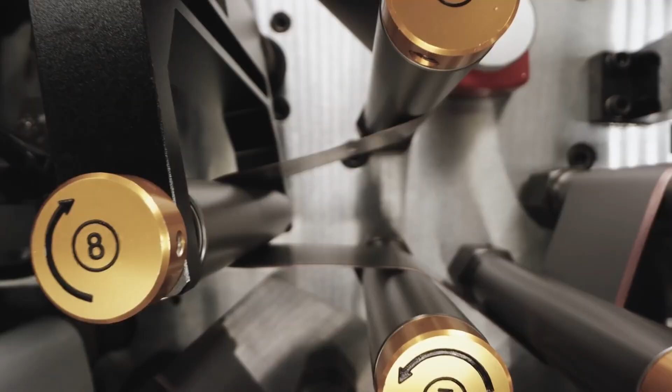The idea for the Sichuan-Tibet Railway was proposed in the early 2010s as part of China's Belt and Road Initiative, BRI. This massive infrastructure development plan aims to improve global trade routes and connect Asia, Europe, and Africa. The railway was seen as a critical step in integrating Tibet into China's national framework while leveraging the region's untapped natural resources. Tibet is rich in copper, lithium, and rare earth materials, essential components for green technologies like electric vehicle batteries and wind turbines.

The Sichuan-Tibet Railway starts in Chengdu, the vibrant capital of Sichuan Province, known for its spicy cuisine and pandas. From Chengdu, the railway heads west to Ya'an, a relatively easy stretch that was completed in 2018. Beyond Ya'an, the route becomes significantly more challenging, as it snakes through the Hengduan Mountains, crosses the Yarlung Tsangpo River Valley, and ascends the Tibetan Plateau.

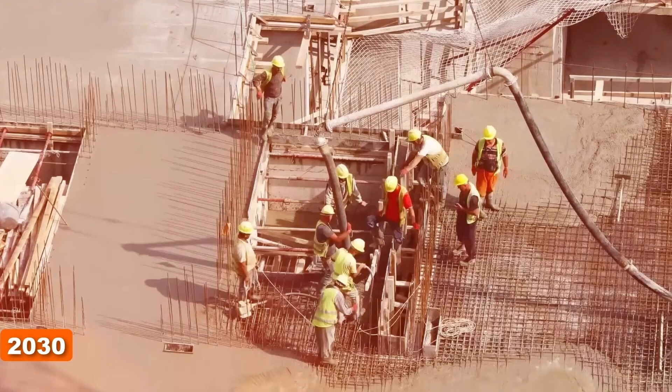This middle segment, which includes 72 tunnels and 121 bridges, is still under construction and expected to be completed by 2030. The engineering challenges are mind-boggling. The railway has to contend with an elevation change of more than 3,000 meters.

The starting point in Chengdu sits at just 300 meters above sea level, while Lhasa sits around 3,600 meters. In some sections, the tracks climb higher than 4,000 meters, where the air is thin and oxygen levels are 40% lower than at sea level.

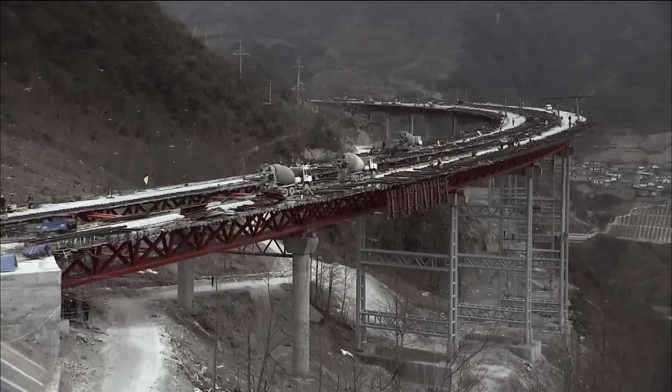To keep trains running safely and comfortably, engineers have equipped them with oxygen diffusion systems and pressurized cabins, similar to those in airplanes. Over 80% of the railway's route is composed of tunnels and bridges.

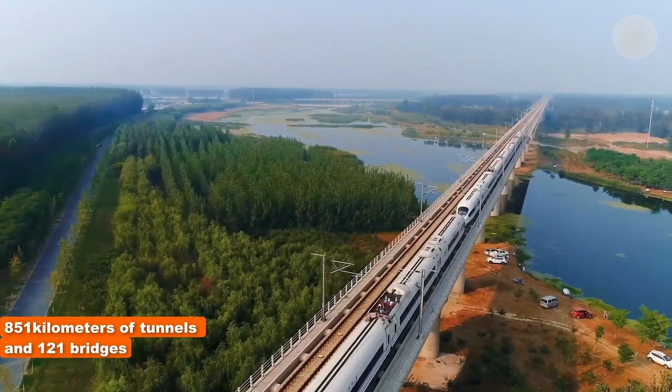The Yangbajing Tunnel, for example, stretches an incredible 42.5 kilometers, making it longer than the Channel Tunnel between England and France. In total, the railway includes 851 kilometers of tunnels and 121 bridges, some of which span massive river gorges and active fault lines. These structures aren't just feats of engineering, they're designed to withstand earthquakes, landslides, and extreme weather.

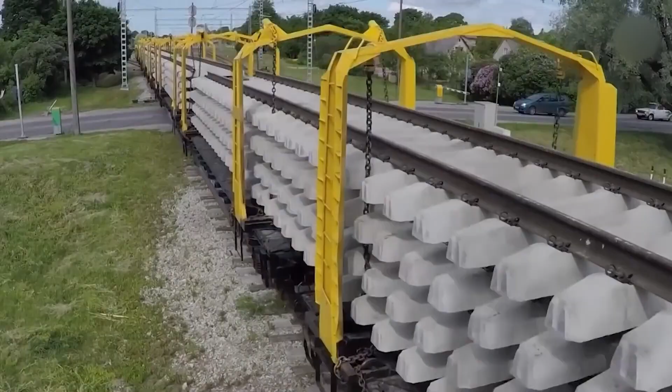The Himalayas are one of the most seismically active regions in the world, so engineers have used shock-absorbing foundations and flexible materials to mitigate the impact of tremors.

Another challenge is permafrost. Building a stable railway on ground that is frozen solid for most of the year but turns into a muddy mess during summer is no easy task. Engineers have employed cooling pipes and insulated foundations to keep the permafrost stable, preventing the tracks from shifting or sinking. These solutions are similar to those used on the Qinghai-Tibet Railway, but have been adapted for the unique conditions of the Sichuan-Tibet route.

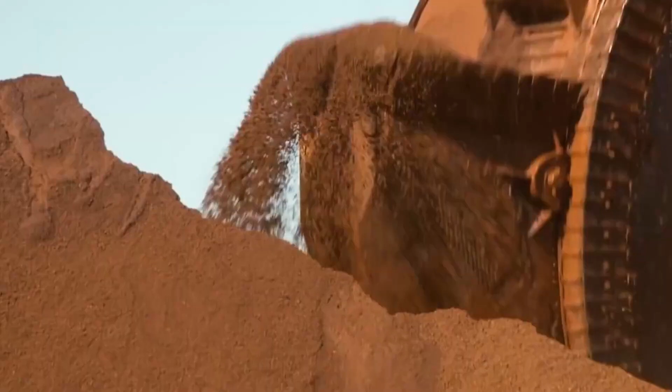Transporting construction materials to remote locations for the Sichuan-Tibet Railway represents one of the most daunting logistical challenges of the project. The terrain is exceptionally rugged, with many construction sites located at altitudes exceeding 4,000 meters. Some areas are so isolated that materials and equipment have to be transported by helicopters, while smaller components are carried on foot by workers navigating steep trails. This adds both time and cost to the construction effort, but such measures are necessary for a project of this scale.

For example, the Mila Tunnel, one of the project's standout engineering feats, stretches 10 kilometers and lies 1,200 meters beneath a mountain range at an altitude of 3,100 meters.

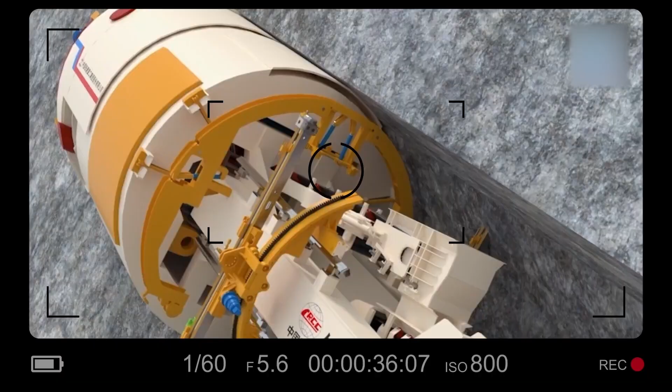Excavating this tunnel required the use of custom-designed tunnel boring machines, TBMs. These are some of the largest and most advanced in the world, engineered specifically for the unique challenges of this project. They're equipped to cut through layers of hard rock and permafrost while maintaining stability under immense geological pressure. The construction teams use advanced seismic monitoring systems to ensure safety, as the region frequently experiences tremors.

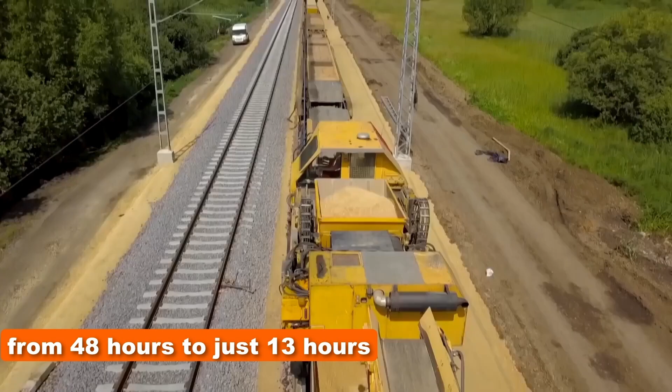The Sichuan-Tibet Railway's economic and strategic implications are monumental. Once completed, the railway will reduce travel time between Chengdu and Lhasa from 48 hours to just 13 hours. This reduction isn't just about convenience, it has the potential to revolutionize trade and mobility in the region.

By facilitating faster and cheaper transportation of goods, the railway will significantly lower logistics costs for businesses. This could lead to increased trade volumes between Tibet and central China, fostering economic growth in one of the country's poorest regions. Improved accessibility also means unlocking Tibet's immense mineral wealth.

The region is rich in natural resources including copper, lithium, and rare earth materials. These materials are critical for industries ranging from renewable energy to electronics. With better transportation infrastructure, mining operations in Tibet could become more economically viable, positioning the region as a key player in global supply chains.

Tourism is another sector poised to benefit. Tibet's breathtaking landscapes, unique culture, and iconic landmarks like the Potala Palace and Mount Everest Base Camp attract millions of visitors every year. The Sichuan-Tibet Railway is expected to increase annual tourist numbers dramatically, injecting billions of dollars into the local economy. This surge in tourism will likely create jobs in hospitality, retail, and transportation, providing new opportunities for local residents.

However, such growth brings its own challenges, especially in managing the environmental impact of increased human activity. Tibet's ecosystem is one of the most fragile on Earth, home to endangered species like the snow leopard, Tibetan antelope, and black-necked crane. The construction of the railway, particularly its tunnels, bridges, and stations, has disrupted wildlife habitats and migration patterns.

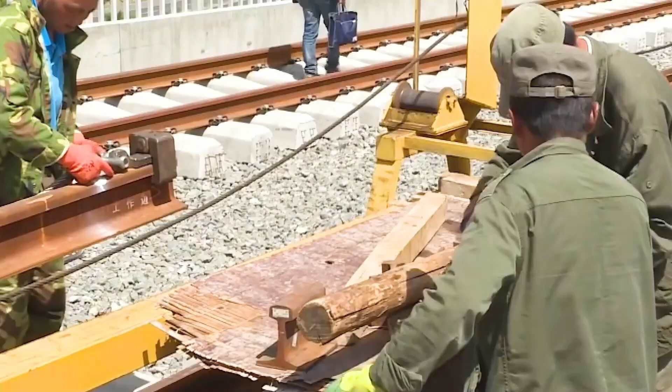The human cost of construction is another significant factor. Thousands of workers endure extreme conditions, including freezing temperatures, thin air, and prolonged isolation from their families. To combat these challenges, construction camps are equipped with on-site medical facilities, oxygen tanks, and acclimatization protocols. Specialized diets and rest schedules help workers cope with the physical and mental toll of working at such high altitudes.

When comparing the Sichuan-Tibet Railway with other monumental railways, its uniqueness becomes even more apparent. The Qinghai-Tibet Railway, completed in 2006, was the first to link Tibet with China's rail network. Stretching 1,956 kilometers, it traverses permafrost and high-altitude plateaus, reaching elevations of 5,072 meters at its highest point. While it set a new benchmark for high-altitude railways, the Sichuan-Tibet Railway pushes the boundaries even further by navigating more complex terrains and using advanced technologies like autonomous construction vehicles and AI-driven monitoring systems.

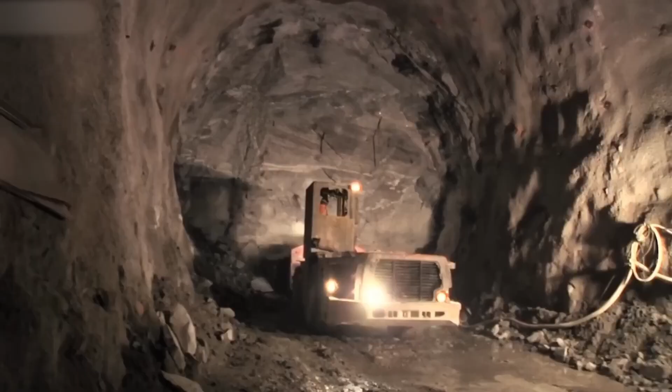In Europe, the Swiss Alps are home to impressive rail systems like the Gotthard Base Tunnel, the world's longest railway tunnel at 57 kilometers. The tunnel cuts through the Alps to improve connectivity between northern and southern Europe. The Swiss project faced challenges like hard rock formations and the need to maintain precise alignments over long distances.

Similarly, the Sichuan-Tibet Railway has adopted cutting-edge technologies to overcome its unique geological challenges, but it must also contend with extreme altitudes and seismic activity, issues not as prominent in the Swiss Alps.

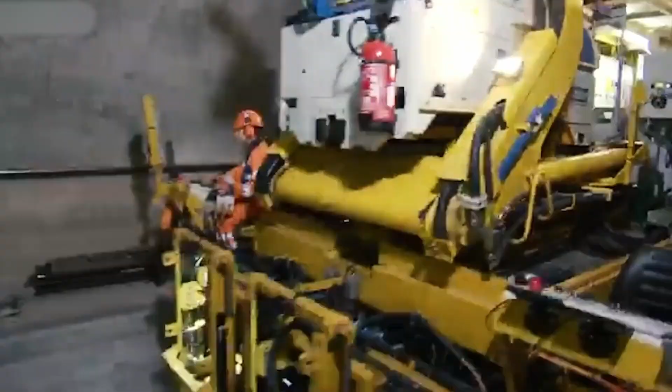Technological innovation is at the heart of the project. The railway employs autonomous construction vehicles, advanced surveying drones, and real-time monitoring to ensure safety and efficiency. The trains themselves are designed for comfort and reliability at extreme altitudes, featuring panoramic windows, climate-controlled cabins, and advanced braking systems for steep descents. These features not only enhance passenger experience, but also demonstrate the technological prowess required to operate in such challenging conditions.

This project is more than just a railway. It's a story of ambition, resilience, and the delicate balance between progress and preservation.

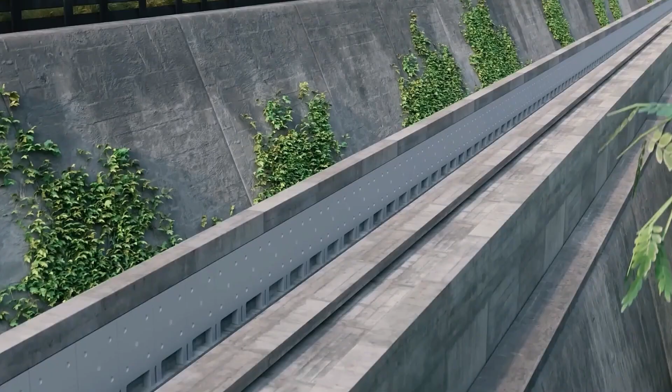What if you could cut your journey time in half, gliding at speeds beyond 500 kilometers per hour while effortlessly floating above the tracks? This isn't science fiction, but Japan's Chuo Shinkansen, a maglev train project set to revolutionize travel between Tokyo and Nagoya. With an estimated cost exceeding $82 billion, it's one of the most expensive infrastructure ventures in history.

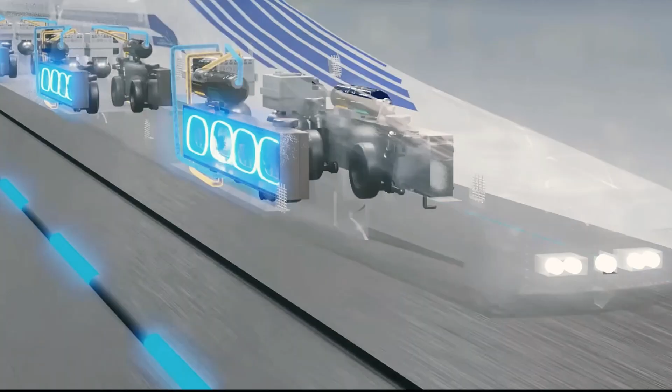Unlike conventional trains, this futuristic system uses magnetic levitation for a smoother, faster ride, drastically reducing travel times and cutting carbon emissions. However, despite its promise, construction delays, budget overruns, and environmental challenges have cast doubt. Can Japan's bold vision deliver on its ambitious promises, or will it falter under mounting obstacles?

Beneath Japan's dynamic urban landscape lies an urgent problem: congestion and travel inefficiency. Major travel routes are increasingly gridlocked, leading to frustrating delays for commuters and significant economic losses. As populations grow and economic demands rise, the existing transportation systems struggle to keep pace. The renowned Shinkansen network, once the pride of Japan, is now grappling with overcapacity, failing to accommodate the rising number of passengers. The need for a revolutionary transportation solution has never been more critical.

In the early 1970s, Japan began its exploration of magnetic levitation (maglev) technology, envisioning a faster, more efficient rail system. This ambitious endeavor culminated in the construction of the Yamanashi test track in 1997, marking a critical milestone in the development of superconducting maglev. After years of rigorous testing and refinement, the construction of the Chuo Shinkansen officially began in 2014.

This new line aims to connect major cities, covering 438 kilometers predominantly through tunnels. The first phase of the project is expected to link Tokyo and Nagoya by 2027, followed by an extension to Osaka targeted for completion by 2037.

This maglev system will reduce travel time between Tokyo and Osaka from 2 hours and 30 minutes to just 67 minutes, greatly enhancing business and tourism opportunities. The Chuo Shinkansen stands not only as an engineering marvel, but also as a testament to Japan's competitive spirit in the global race for high-speed rail.

Currently, China's Shanghai maglev is the world's only operational high-speed maglev, but Japan's system is set to surpass it in both distance and speed, reaching 505 kilometers per hour. Moreover, Japan's L0 series maglev even achieved a record speed of 603 kilometers per hour in 2015.

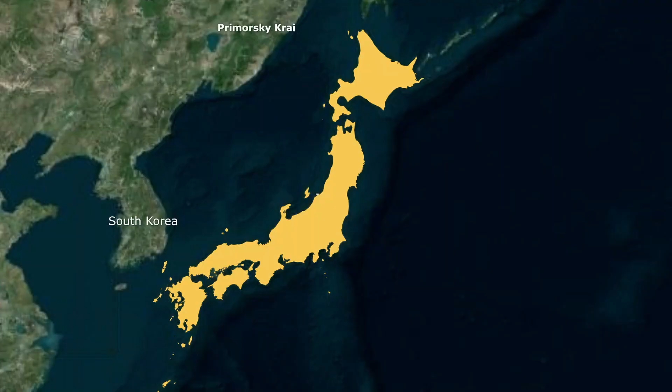Economically, the maglev is poised to transform Japan by linking Tokyo, Nagoya, and Osaka into a cohesive metropolitan hub. This integration is expected to attract investments and generate an estimated economic impact of up to 17 trillion yen over the first 50 years of operation.

Additionally, the line's efficiency will appeal to tourists, allowing them to explore Japan's iconic cities within a single day. While constructing this advanced network involves substantial costs and extensive tunneling, nearly 90% of the line to Nagoya will be underground. It reflects Japan's ambition to create a faster, safer, and more resilient transportation infrastructure.

Designed to withstand earthquakes and provide a seamless travel experience, Japan's maglev project aims to not only transform domestic travel, but also inspire similar innovations worldwide. As it evolves, this groundbreaking train could serve as the blueprint for next-generation rail systems globally. But what innovative technologies and engineering feats are being employed to make this ambitious vision a reality?

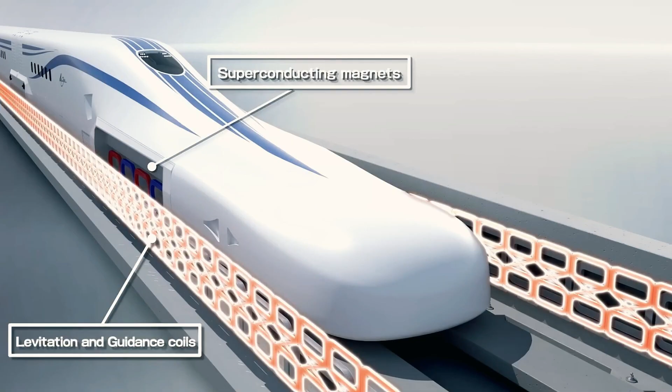At the heart of the Chuo Shinkansen is its innovative use of superconducting magnetic levitation (SC maglev) technology. Unlike traditional high-speed trains, which run on rails with wheels, the maglev train floats above the track using powerful magnets. These magnets generate lift and forward propulsion, eliminating the friction that usually slows down rail vehicles. The SC maglev trains hover approximately 10 centimeters above the track, allowing them to reach unprecedented speeds while maintaining energy efficiency.

The principle of magnetic levitation involves a set of powerful magnets on both the train and the tracks. These magnets work in opposition to one another, creating lift that pushes the train off the ground. A second set of magnets on the track generates a forward thrust, pulling the train along.

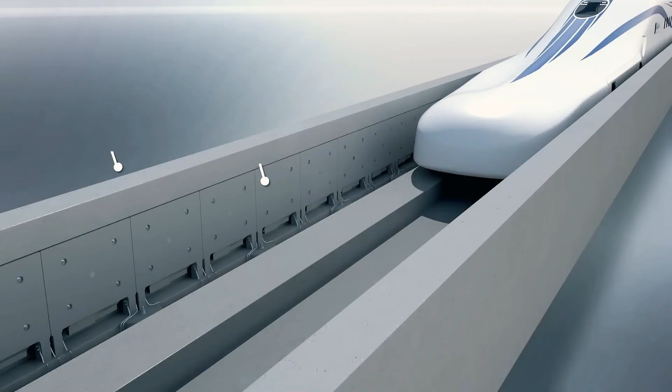One of the key features of the Chuo Shinkansen's design is the figure-8 configuration of the coils along the track. This arrangement helps stabilize the train, keeping it centered and balanced even at high speeds. Stability is particularly important in Japan, a country prone to earthquakes, making the system's safety features a top priority.

Building this maglev line requires an immense amount of engineering expertise. Much of the track will be underground, with nearly 90% of the Tokyo to Nagoya route running through tunnels. The largest of these tunnels will cut through the southern Alps, reaching depths of up to 1,400 meters. This 25-kilometer-long tunnel alone is one of the most complex and challenging segments of the project.

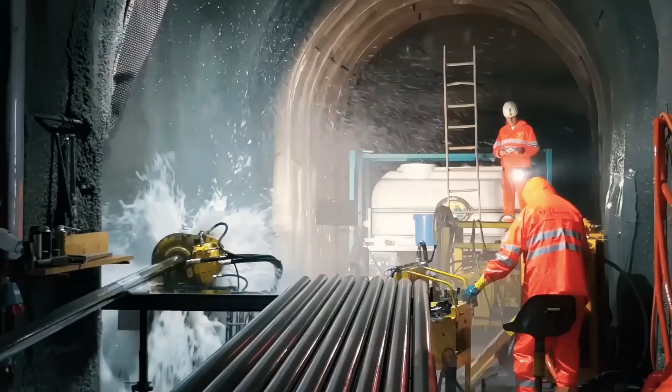Drilling through Japan's mountainous terrain requires precision and careful management of geological factors like groundwater and seismic activity. The use of specialized boring machines ensures that the excavation is both efficient and safe, reducing the risks of collapse or other accidents.

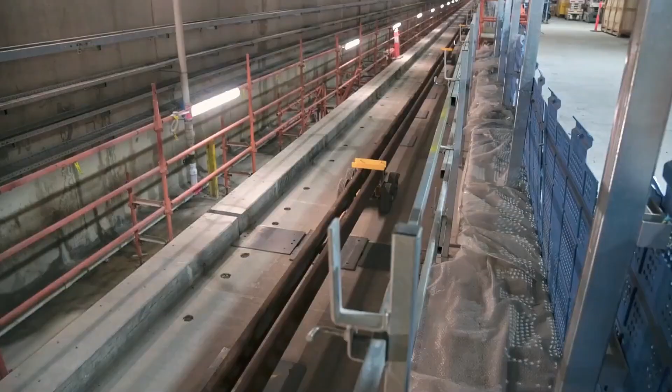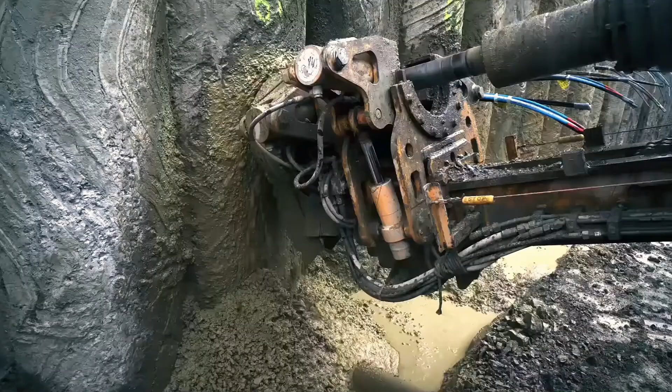Building stations for the maglev system adds another layer of complexity. One of the key terminals, Shinagawa Station in Tokyo, will feature 4 tracks and 2 platforms, all underground. Constructing a new station underneath a city that already has one of the busiest train hubs in the world presents a delicate challenge. Engineers must carefully plan every stage of the process to avoid disrupting the existing Shinkansen and subway lines that run just above the planned maglev platforms. This involves drilling, reinforcing, and ensuring that the structural integrity of the surrounding infrastructure remains intact.

The tracks for the Chuo Shinkansen are designed to optimize speed while maintaining safety. For instance, the minimum curve radius is set at 8,000 meters to allow the train to maintain high speeds even on turns. Additionally, the gradient can reach up to 4%, helping the train to climb steep slopes found in Japan's mountainous regions without losing momentum.

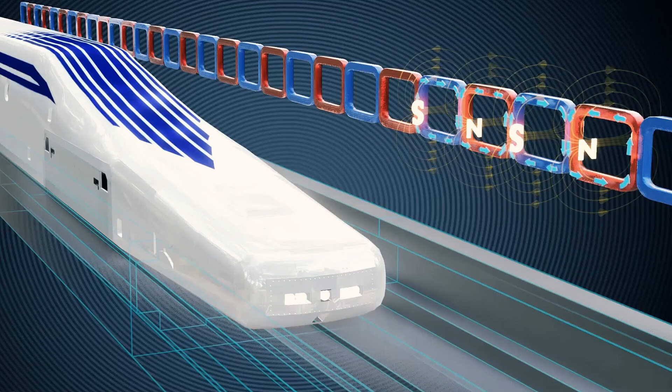The propulsion and levitation systems built into the tracks are powered by a series of electromagnetic coils. These alternating electromagnets interact with superconducting magnets on the train, creating a thrust that propels the train forward through linear induction. Essentially, the entire track becomes a motor that drives the train, a process that is highly efficient but requires precision engineering.

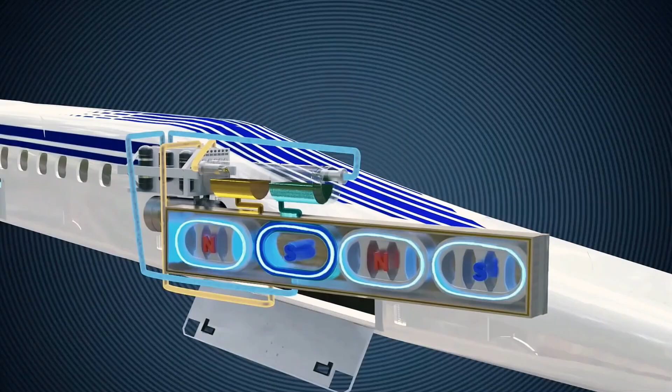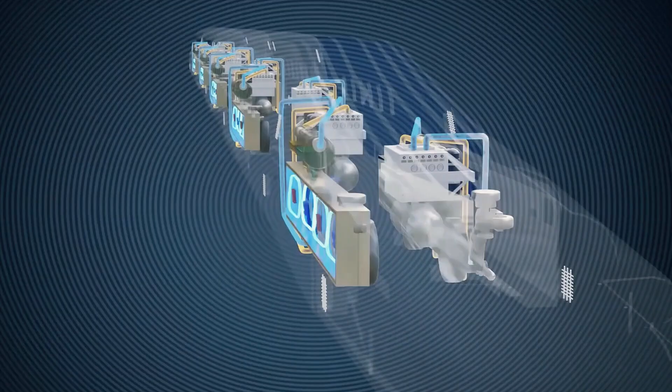Maintaining the superconducting magnets is a challenge in itself. To achieve the required magnetic levitation, the magnets must be cooled to extremely low temperatures. Liquid helium cools the superconducting coils to negative 269 degrees centigrade, maintaining their superconducting state. A specialized cooling system known as a pulse tube refrigerator is integrated into the train to manage temperature fluctuations efficiently. This technology is adapted from aerospace applications, underscoring the advanced nature of the project's design.

Energy consumption is another crucial factor. Although the Chuo Shinkansen is expected to use 30% more energy than the current Shinkansen network, it is still more energy efficient than other modes of transport over similar distances, such as short-haul flights. The maglev system generates some of its energy through regenerative braking, which converts kinetic energy back into electrical power when the train slows down. This system reduces the train's overall energy consumption and makes it more sustainable.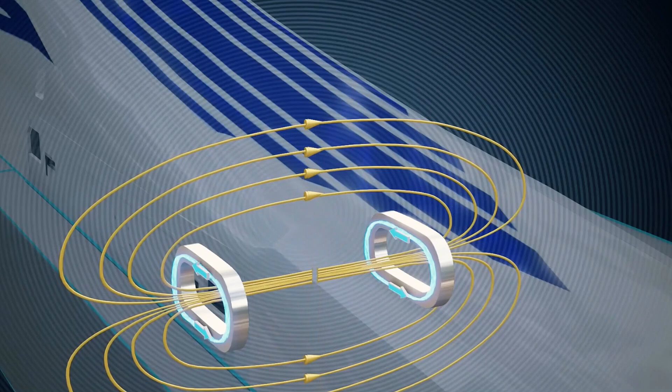One of the most pressing technical challenges is managing the electromagnetic fields generated by the maglev system. The powerful magnetic forces that lift and propel the train create electromagnetic fields that could potentially interfere with passengers' electronic devices, or worse, pose health risks. To address this, engineers developed shielding made of electric steel to protect the passenger cabins. This shielding redirects the magnetic fields away from the train's interior, ensuring the safety and comfort of travelers.

Despite its innovative technology and ambitious goals, the Chuo Shinkansen project has faced numerous obstacles. Delays have become a significant issue, particularly due to environmental concerns in Shizuoka. The prefecture's opposition to the project has already pushed back the planned opening of the Tokyo-Nagoya route from 2027 to 2034. Negotiations are ongoing, but the project's future depends largely on resolving these local issues. JR Central has committed to continuing its efforts to find a compromise, but there's no guarantee that construction will proceed smoothly.

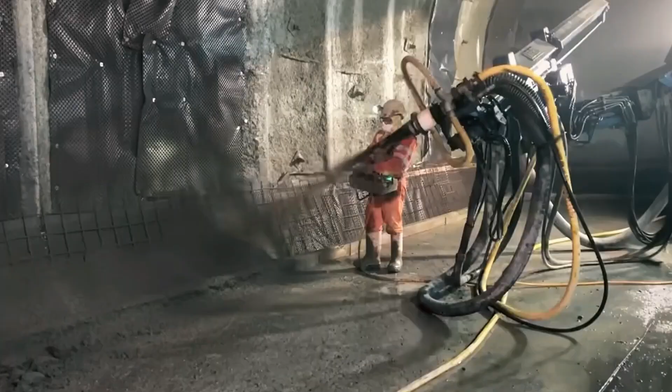After years of debate, the company behind the Chuo Shinkansen proposed mitigation efforts such as controlling dam releases and providing compensation for potential losses, though these measures have not fully eased local concerns.

Cost is also a factor that looms large over the Chuo Shinkansen. The total project budget is estimated to exceed $82 billion, making it one of the most expensive infrastructure developments in Japanese history. Financing the project involves a combination of private investment and government loans, with expectations to recoup some of the costs through future passenger fares.

However, with such a hefty price tag, there are concerns about whether the line will be profitable in the long term, especially if delays continue to push back the opening date. Ticket prices are expected to be only slightly higher than those of the current Tokaido Shinkansen, meaning that the margin for profit is slim.

The Chuo Shinkansen is a bold venture that showcases the potential of superconducting maglev technology to revolutionize high-speed travel. Its groundbreaking design, from the electromagnetic propulsion system to the deep tunnels under Japan's southern Alps, represents a leap forward in transportation engineering.

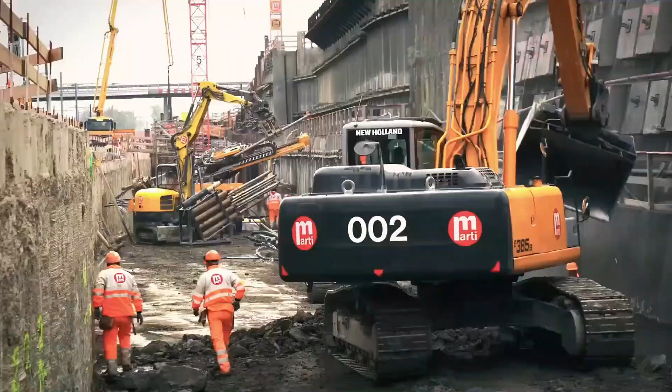However, the project's many challenges, including environmental concerns, safety risks, and financial hurdles, pose significant obstacles that must be overcome. Whether the Chuo Shinkansen can meet its ambitious goals will depend on how well these challenges are managed in the coming years. The world is watching, and the future of high-speed rail may well be determined by the success or failure of this remarkable project.

What do ancient paths, bustling trade routes, and a cutting-edge railway tunnel have in common? They're all part of humanity's quest to conquer the Alps. If you step into a time machine and witness travelers' struggles across these mountains over millennia, from weeks-long journeys to a mere 2-hour trip, it's easy to see how far humanity has come.

The $26 billion Mont d'Ambin base project is the latest chapter in this epic saga. From Alpine crossings and rugged trails to what is now the world's longest 57.5-kilometer underground marvel, you'll discover how each era's innovations shaped our travel, trade, and society.

But what if I told you the reason this tunnel is breaking records has nothing to do with engineering ambition, and the unexpected cause behind it will leave you speechless?

From the time of Hannibal to the age of modern highways, the Alps have presented a daunting challenge to travelers, subjecting them to the biting cold, treacherous ice, and howling winds. The Romans, master road builders, established the first reliable routes through these mountains and remain engineering marvels until this day.

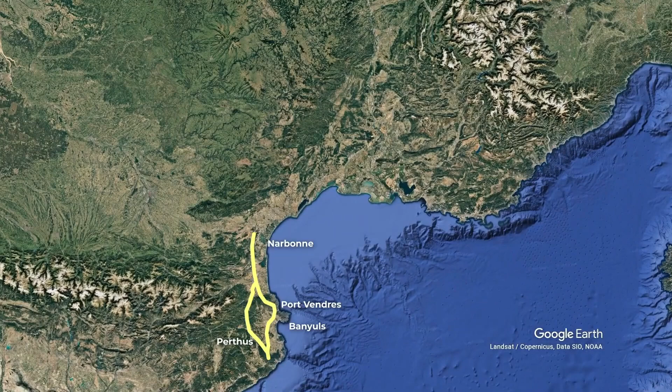One of the Romans' greatest achievements was the Via Domitia road that linked Italy to Gaul and became a vital trade artery for military personnel and traders, with the road continuing to influence modern Alpine construction.

Then came the great military genius, Napoleon, recognizing the strategic importance of Alpine passes, invested heavily in road improvements, and between 1802 and 1810, Napoleon's army followed Roman ingenuity with the construction of 2 mountain passes. First, the Great St. Bernard Pass, which has been used since Roman times, with Napoleon ordering significant improvements, making it easier to travel for his military campaigns, especially during his famous crossing in 1800 before the Battle of Marengo.

Second was the construction of the Mont Cenis Pass over Mont Cenis, turning what was once a rough mountain path into a fully engineered route capable of handling heavy military and trade traffic.

But the real game changer came in the late 19th century with tunneling technology. The Frejus Rail Tunnel, opened in 1871, pioneered a new era of Alpine crossings and is still in use today, which is a testament to those 19th century engineers' ingenuity.

There's a catch though. While the Frejus Tunnel was revolutionary, it's beginning to show its age. And although some modern trains can still fit, the tunnel's loading gauge is limited to 3.68 meters in width, 12.07 feet, and 4.28 meters in height, 14.04 feet, significantly restricting which trains can pass through compared to newer tunnels.

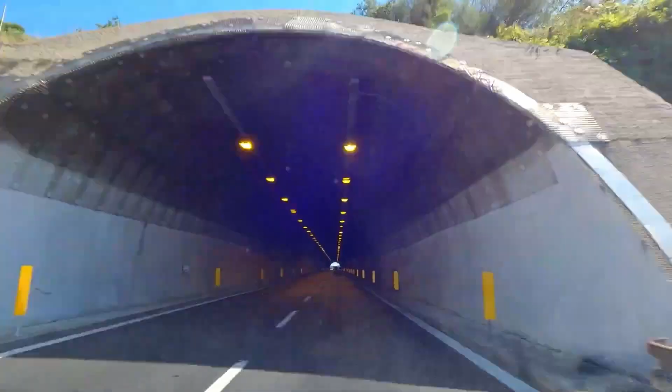Traffic congestion is just the beginning. These heavy vehicles are taking a toll on the environment, spewing emissions into pristine alpine air. Add in noise pollution and strain on local communities, and it's clear our current system of alpine crossings is under pressure. How is this monumental problem being addressed?

A long, low-elevation, 57.5-kilometer tunnel passage cutting straight through the mountains. The tunnel is flatter, faster, and more efficient than its high-altitude counterparts, and will carry loads up to 1,500 tons, more than double the current maximum of 700 tons.

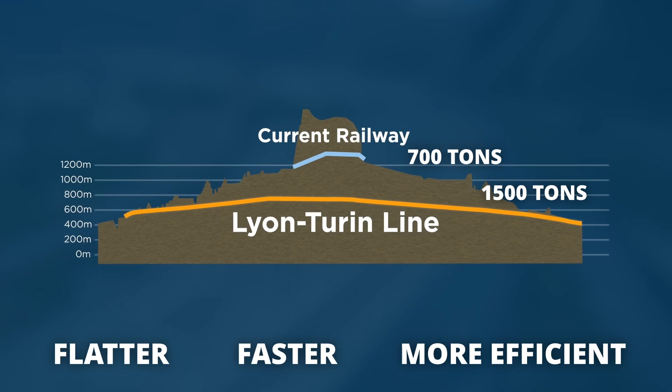This massive boost in freight capacity may not involve war elephants, but its impact on alpine crossings could be just as transformative. We start our journey here in the Maurienne Valley, France, where twin tubes, each with an internal diameter of 8.4 meters, wide enough to fit a Boeing 747 airplane, will stretch an incredible 57.5 kilometers until it reaches the Susa Valley in Italy.

These dimensions are designed to accommodate high-speed passenger trains zipping along at speeds of up to 220 kilometers per hour, while freight trains will cruise at a respectable 100 kilometers per hour.

But how on earth do you dig a tunnel this long through some of the harshest terrain on the planet? Well, you bring in the cavalry.

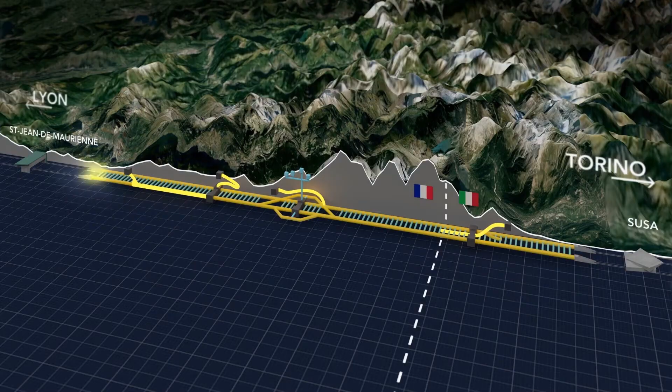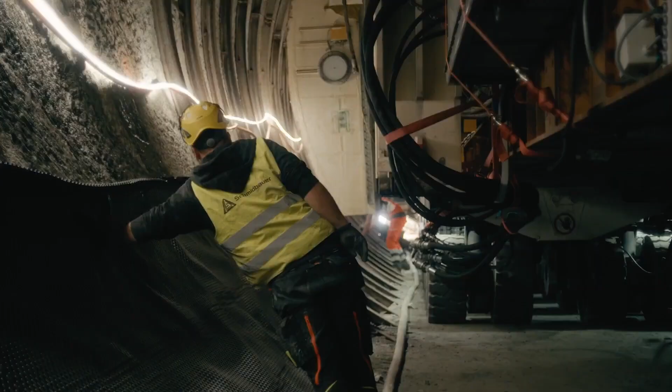Yep, that's right, 7 tunnel boring machines will be used to carve through the high-pressure rock formations. And who do you think the Italians and French are sourcing these colossal tunnel boring machines from? The Germans, of course. Located in Schwanau, Germany, the company Herrenknecht was founded in 1977 by Martin Herrenknecht. Over the decades, this company has become a world leader in manufacturing tunneling technology, specializing in hard rock formations, micro-tunneling, underwater projects, mixed shield tunneling, and more. Their tunnel boring machines have powered some of the most ambitious tunneling projects in the world.

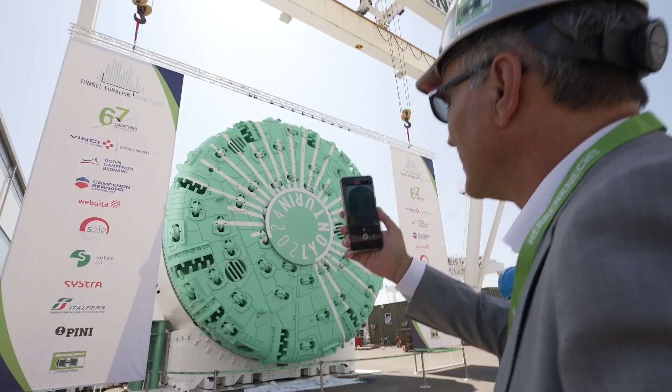From the Gotthard Base Tunnel in Switzerland, completed in 2016 and stretching 57.1 kilometers, to the Channel Tunnel, which opened in 1994 and spans 50.45 kilometers beneath the English Channel. Then there's the Brenner Base Tunnel, another Alpine mega-project located between Austria and Italy, scheduled for completion in 2032, with the main tunnel section spanning 55 kilometers. These engineering marvels wouldn't be possible without Herrenknecht's cutting-edge technology, shaping the future of underground transportation.

Herrenknecht produced a 10.4-meter diameter gripper TBM, weighing 3,200 tons and measuring 334 meters in length. This machine is responsible for excavating an 18-kilometer section of one of the twin tunnels, starting near Modane, France, and extending all the way to the Clarea underground safety site in Italy.

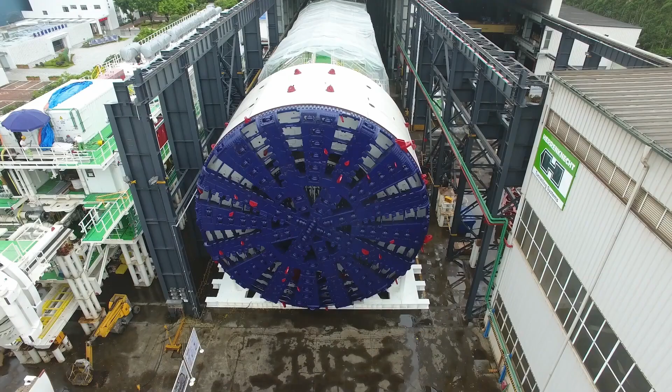However, even the most advanced tunnel boring machines need a well-organized team behind them. That responsibility falls on Elliott Consortium and TELT, the key players driving the project forward. Managing a project of this scale takes more than just powerful machinery. It requires expert oversight and precise execution.

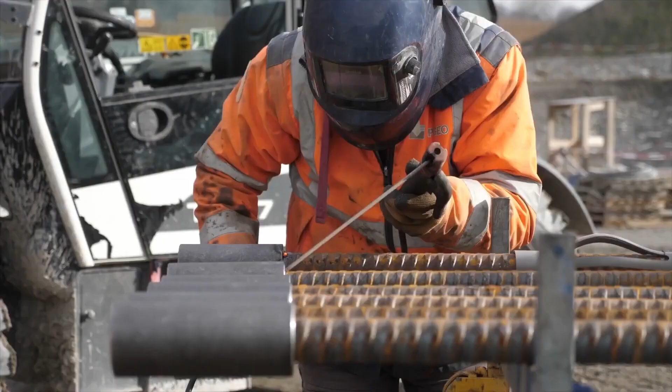TELT, the Tunnel Euralpin Lyon-Turin organization, is the binational authority overseeing the entire cross-border section and are responsible for project coordination, ensuring everything stays on schedule and meets international safety and environmental standards. They handle the big picture planning, funding, and collaboration between France and Italy.

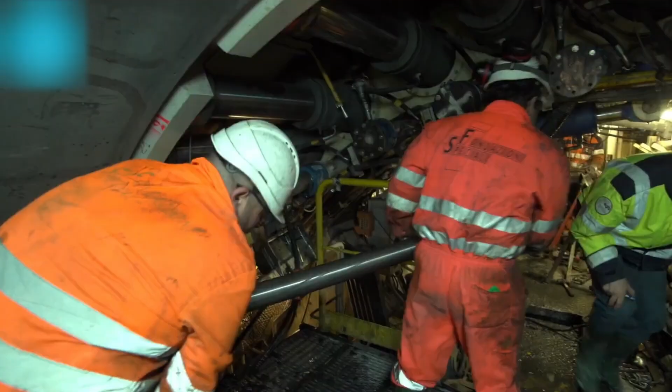But when it comes to the actual tunnel excavation, that's the job of the Elliott Consortium, a powerhouse team of engineering firms, including Eiffage Génie Civil, Spie batignolles, Ghella, and Cogeis. Their role? Operating the massive tunnel boring machines, managing the workforce, and reinforcing the structure as they carve through the Alps. Together, these two organizations are turning this ambitious vision into reality, laying the groundwork for Europe's next great high-speed rail corridor.

Of course, there's more to it than meets the eye, because digging a tunnel from 2 different locations and making sure both ends meet perfectly isn't just a fun guessing game. It's sheer skill, planning, and mathematical precision.

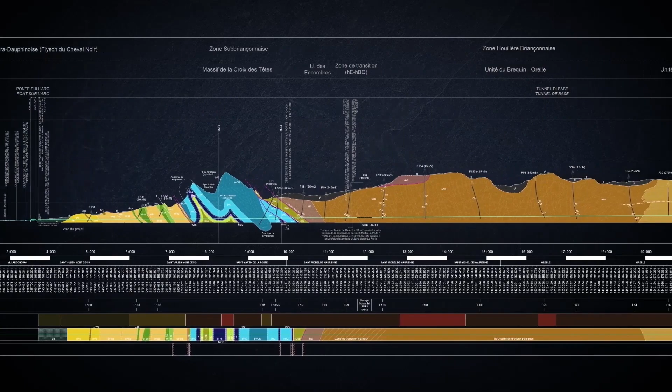To pull it off, engineers rely on advanced navigation and surveying technology. It all starts with GPS and geodetic surveying, which creates a highly detailed 3D map of the terrain, ensuring the tunnel follows the right path. Laser guidance systems inside the tunnel continuously measure and adjust the TBM's direction in real time, keeping them on course. But since GPS doesn't work deep underground, gyroscopic alignment systems and inertial navigation systems take over. These tools track the TBM's movement with extreme precision, preventing any deviation.

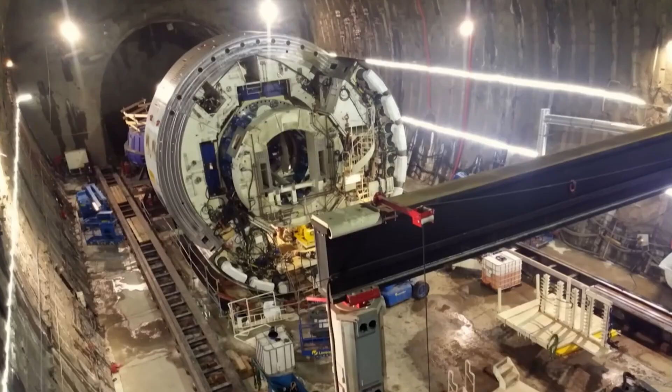Companies like Herrenknecht's VMT, Honeywell Aerospace, and iXblue provide these cutting-edge solutions, while the consortium handles the excavation. In the Gotthard Base Tunnel, the final breakthrough was only 8 centimeters off after drilling from both sides, in almost perfect alignment. That's the level of precision required for the Mont d'Ambin Base Tunnel to succeed, proving that modern tunneling is as much about accuracy as it is about power.

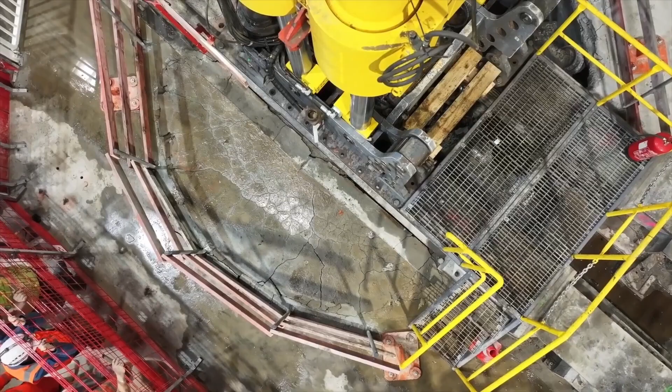Ventilation is another crucial aspect. At 500 meters underground, fresh air doesn't come easy. The tunnel will include vertical ventilation shafts, drilled using raise boring machines that extend more than half a kilometer deep.

Constructing these shafts involves an incredibly precise process. First, a small pilot hole is drilled from the surface of the mountain down to the tunnel level. Once it reaches the desired depth, a reamer head is attached at the tunnel level and pulled upward, gradually enlarging the hole to its full diameter as it ascends toward the surface.

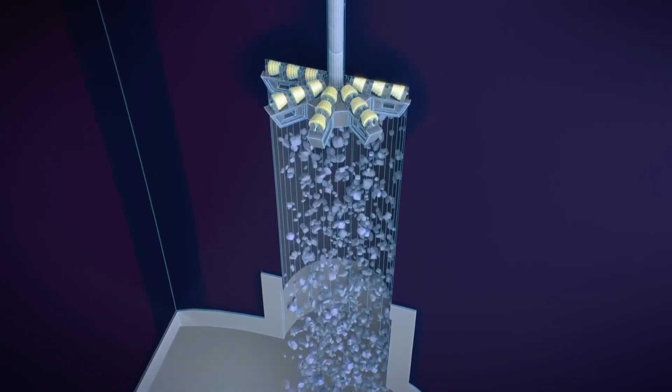This upward reaming process allows the excavated material to fall naturally to the tunnel floor, making removal easier and minimizing surface disruption. The raise boring method is favored for its safety and accuracy, as it reduces the risk of ground instability compared to traditional downward excavation techniques.

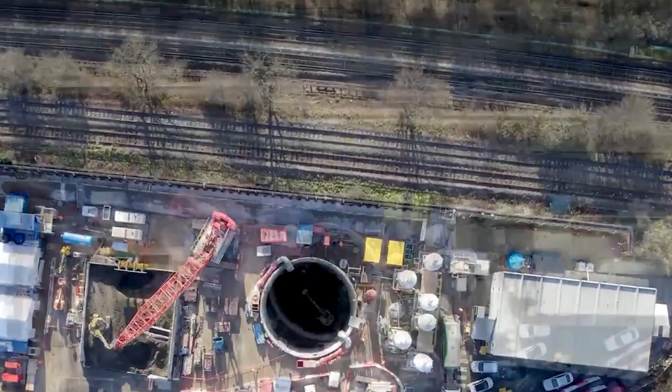By constructing these vertical shafts with such precision, engineers ensure a continuous supply of fresh air, which is essential for both operational efficiency and the safety of workers deep underground.

It's like building an upside-down skyscraper, all to keep the air flowing for high-speed trains and maintenance crews working beneath the Alps. The payoff for all this innovation and engineering prowess? A non-stop journey from Lyon to Turin will take just 1 hour and 47 minutes, compared to the current 3 hours and 47 minutes. That's 2 hours saved every trip.

Multiply that by thousands of passengers and hundreds of freight shipments daily, and you start to see the immense impact. Imagine hauling up to 1,500 tons of goods—that doubles the current capacity through the Mont Cenis Base Tunnel.

This isn't just an upgrade, it's a freight revolution poised to transform trade between France and Italy, two of Europe's largest economies. In 2023 alone, France imported $8.25 billion worth of machinery and $6.59 billion worth of vehicles from Italy, making efficient transport routes crucial.

Currently, goods like electronics, pharmaceuticals, textiles, agricultural products, and industrial materials move through the Alps using a mix of road and rail transport. Trucks dominate freight movement, with tunnels like Frejus handling up to 80% of commercial road traffic. However, the new tunnel aims to shift much of this freight to rail, reducing road congestion and cutting CO2 emissions by around 1 million tons annually.

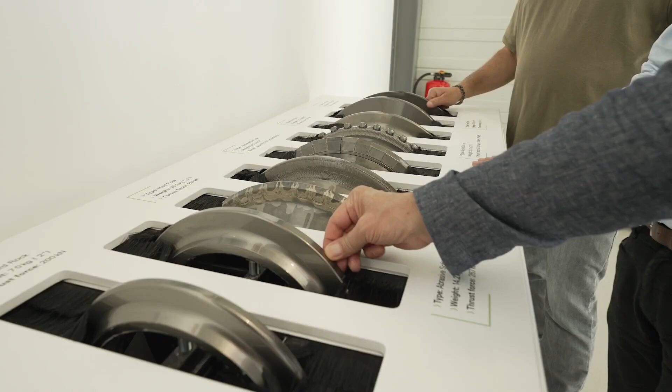Of course, all this comes at a monumental price of $26 billion, which is enough to make anyone's jaw drop. But France, Italy, and the entire European Union are convinced this massive investment will reshape the economic landscape of an entire continent. First, let's break down where all this money's coming from.

The European Union is footing 40% of the bill for the cross-border section, including our star player, the Mont Cenis Base Tunnel. Italy's throwing in 35%, and France is covering the remaining 25%.

But with the price tag skyrocketing to $26 billion, it's not just about the numbers. Opposition from environmental groups and local communities has shaped the project in ways that can't be ignored. Not everyone is on board with this project.

Environmental groups like CIPRA and Mountain Wilderness have voiced serious concerns about the tunnel's impact on the Alps. The biggest issues? Disrupting fragile ecosystems, disturbing hazardous materials like asbestos and uranium, and altering the region's water systems.

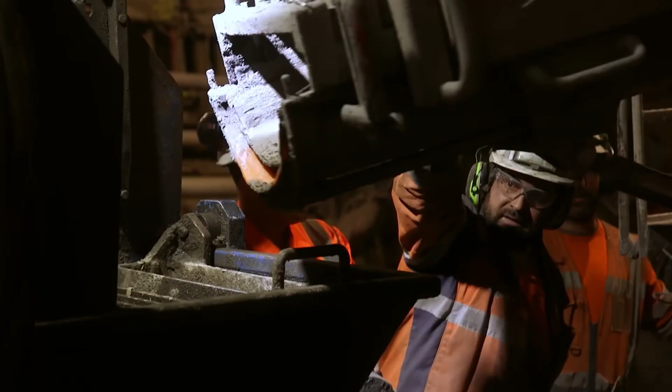And they didn't just complain, they took action. After years of protests, including major demonstrations in the Susa Valley, engineers were forced to rethink their approach. By 2023, the tunnel's design was changed, extending it from 52 kilometers to 57.5 kilometers, allowing for deeper underground routing to minimize surface disruption. Ironic, right? The Mont Cenis Base Tunnel will become the world's longest tunnel, all because of some committed protesters in the Susa Valley.

With all the protests and opposition, most recognize the benefits will outweigh the initial costs, and it's very clear why. A cleaner alternative to road and air travel, and less traffic congestion in the Alps as freight shifts from trucks to trains.

It's about reshaping how we think about transportation across an entire continent by providing real competition to air travel for both business and pleasure, knitting the continent closer together, one rail line at a time.

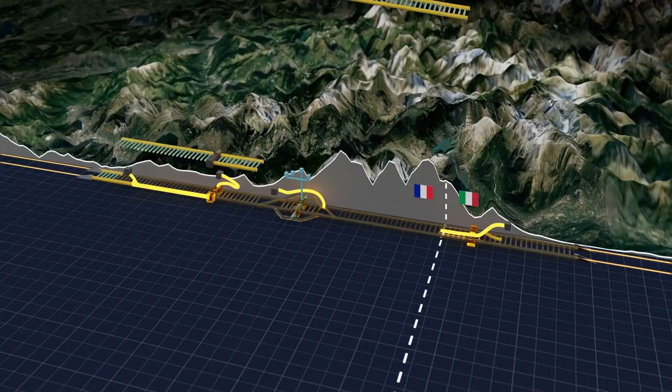The Mont Cenis Base Tunnel isn't just another infrastructure project. It's a testament to human ingenuity, reshaping trade and tourism between France and Italy as part of Europe's vision for sustainable transportation. The EU's significant funding commitment shows its transformative potential.

But why stop here? As we bore through mountains, what other impossible barriers might we overcome? Could this tunnel be our bridge into tomorrow, paving the way for even more ambitious projects?

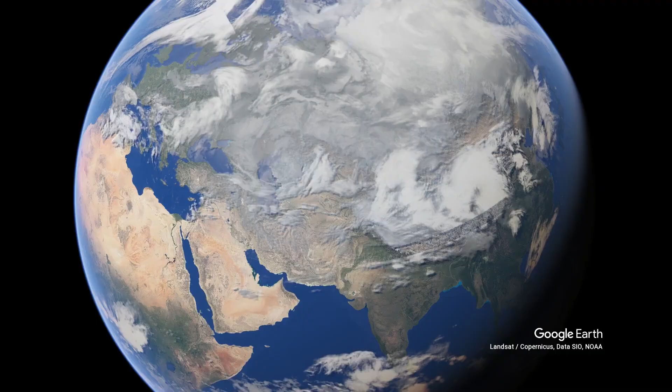An $8 billion China-Kyrgyzstan-Uzbekistan CKU railway set to begin construction in July 2025, with a high-speed freight corridor that will slice through Central Asia, completely bypassing Russia. Transit times will drop by a full week, making Chinese products arrive faster, cheaper, and with fewer geopolitical headaches.

Such plans were solidified on June 6, 2024, when an intergovernmental agreement was signed to commence the railway's construction. This event was notably attended via video link by Chinese President Xi Jinping, Kyrgyzstan's President Sadyr Japarov, and Uzbekistan's President Shavkat Mirziyoyev, underscoring the project's importance at the highest levels of leadership.

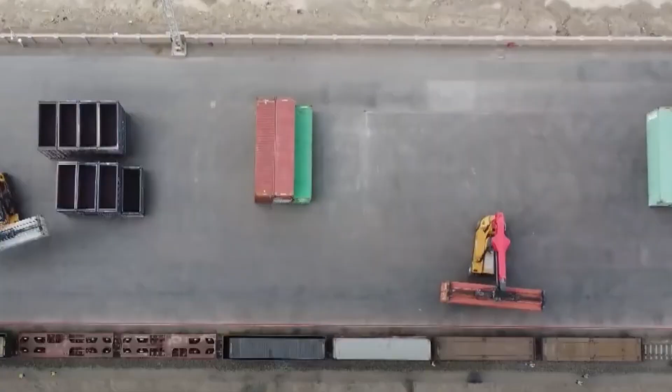Here's another wild fact: the CKU railway will provide the first-ever railway connection between China and Kyrgyzstan. That's right, despite being neighbors, China and Kyrgyzstan have never had a direct rail link. This project finally changes that, giving Kyrgyzstan a massive boost in trade opportunities.

But just because the CKU railway will have more precision than a Swiss railway timetable, don't think for a second Kazakhstan is taking this lightly. Kazakhstan's president, Kassym-Jomart Tokayev, is wasting no time upgrading sections of the 4,250 kilometer Trans-Caspian International Transport Route, TITR, also known as the Middle Corridor, which links Southeast Asia, China, Kazakhstan, crosses the Caspian Sea, and continues through Azerbaijan, Georgia, and Turkey before reaching European destinations.

For decades, Kazakhstan was the only Central Asian country with a direct railway connection to China. But with the arrival of the CKU railway, Kazakhstan's trade corridor is under threat. Apart from now having to compete against the new kids on the block, Kazakhstan's drive to upgrade their long-lasting network isn't out of fear, but an increase in demand.

In 2022, the Middle Corridor railways experienced an 86% increase in traffic handling, approximately 3.2 million tons, mostly a result of the sanctions placed on Russia by Western nations, which was then exacerbated by the outbreak of the Russia-Ukraine conflict. With all that being said, the scale of the CKU transformation is hard to overstate.

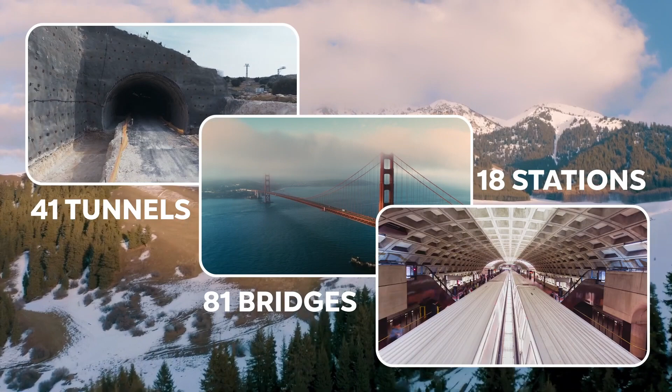The Tian Shan mountain range. This mountain range spans an enormous distance of over 2,800 kilometers across China, Kyrgyzstan, Kazakhstan, and Uzbekistan, with much of this range running right through where the railway needs constructing. Over 41 tunnels, 81 bridges, and 18 stations will be developed to complete this project, all while dealing with frequent earthquakes, extreme weather, and steep mountain passes. The technical complexity alone makes this one of the most ambitious railway projects in the region.

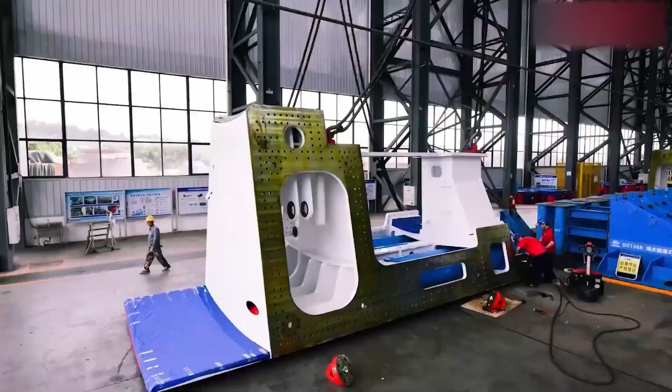But the biggest challenge isn't the mountains, it's the money. The total project cost is estimated at $8 billion, with $4.7 billion allocated for the Kyrgyz section alone. That's more than half of Kyrgyzstan's GDP, which stands at just $9 billion.

To fund its portion, Kyrgyzstan has taken out a $2.35 billion loan from China, raising serious concerns about falling into a debt trap. If Kyrgyzstan struggles to repay, Beijing could gain control over key infrastructure, something that has already happened in other Belt and Road Initiative (BRI) projects, like Sri Lanka's Hambantota port.

Then there's security, which is another major issue. The railway runs through areas known for drug trafficking and smuggling, particularly the Golden Crescent, which is a hub for opium production in Afghanistan, Iran, and Pakistan.

There are fears the new transport route could be exploited for illegal trade, human trafficking, and even the movement of extremist groups. China has been cracking down on separatist movements in Xinjiang, where the railway begins, and the last thing Beijing wants is a security threat along a major trade corridor.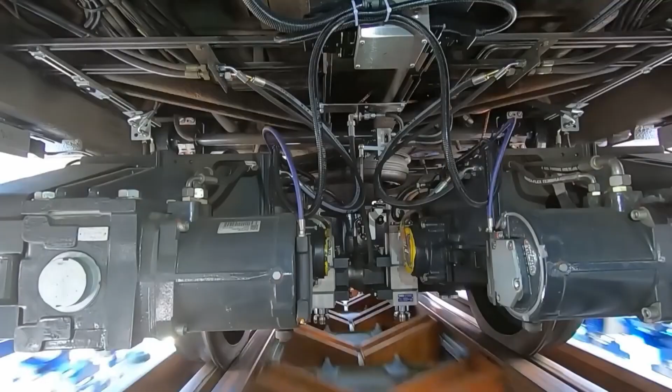Even if everything goes according to plan, the gauge difference between China and Central Asia adds another layer of complexity. China's railway system operates on a standard gauge of 1,435 millimeters, while Kyrgyzstan and Uzbekistan use the wider 1,520 millimeter gauge, a legacy of the Soviet era. This means goods will need to be transferred to different train cars at the border, adding delays and costs. While automated bogie exchange systems or new transshipment hubs could help, it's another logistical hurdle that could slow things down.

Despite these challenges, a groundbreaking ceremony began on December 27, 2024, attended by leaders from China, Kyrgyzstan, and Uzbekistan. If everything stays on track, the CKU railway is expected to be completed by 2029. Once operational, it will carry 10 to 12 million tons of cargo per year, giving Kyrgyzstan and Uzbekistan direct access to China and new markets in Europe and the Middle East.

The stakes couldn't be higher. If successful, this railway will shift the balance of power in Central Asia, reducing Russia's grip on trade and strengthening China's economic dominance. But with billions on the line, political tensions rising, and extreme construction challenges ahead, the real question is, will the CKU railway deliver on its promises, or will it become another costly geopolitical gamble?

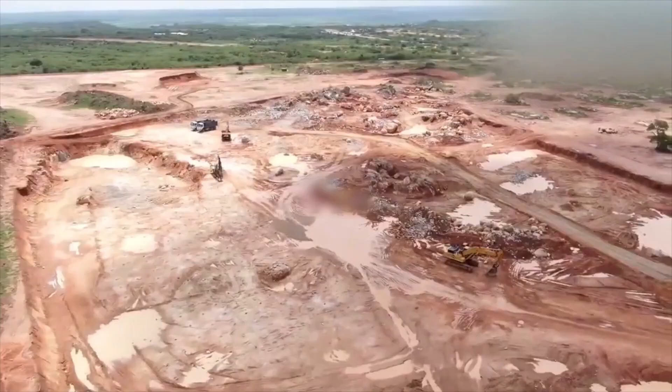Stretching an incredible 1,637 kilometers, this high-speed electric railway zips passengers at 160 kilometers per hour and freight at 120 kilometers per hour, starting at the bustling port of Dar es Salaam and ending in Isamilo. It's a game-changing mega-project, positioning Africa as a rising power in global trade. But beneath the promise of progress lies a burning question: is this railway truly African?

Projects like the Tanzanian Railway aren't just impressive in scale, they're also a symbol of China's growing grip on Africa. With the continent relying heavily on Chinese loans and even military support, we have to ask, is this real progress, or has a Trojan horse quietly arrived on Africa's shores? Stick around, because in this video, we're uncovering the truth.

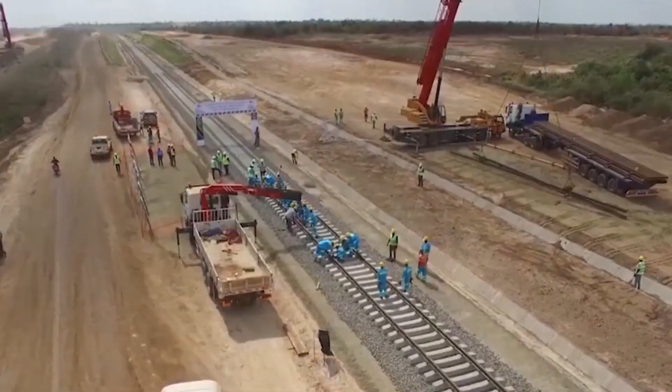The Tanzanian Standard Gauge Railway, or SGR, is changing how Tanzania moves, works, and grows. It's a massive project stretching across the country, starting at Dar es Salaam on the eastern coast, right by the Indian Ocean. From there, it cuts across Tanzania's heartland and ends near Mwanza in the north at Isamilo on the southern shore of Lake Victoria. This isn't just a railway, it's a fast, all-electric system built for both passengers and heavy cargo. Let me take you through how it works, how it's being built, and why it matters.

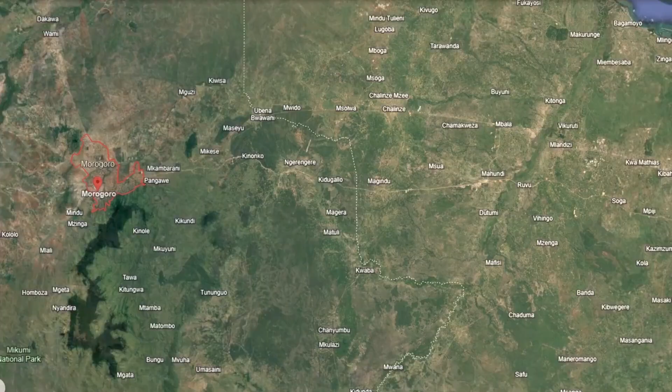The first section of this railway starts in Dar es Salaam, Tanzania's busiest city and main port. It's where goods from all over the world arrive by sea. From there, the railway travels west for 300 kilometers to Morogoro. This city lies inland and is an important link between the coast and the rest of the country. Construction for this section began in April 2017. It's now fully operational and ready for passengers as of August 2024. Trains here can run at speeds of up to 160 kilometers per hour, meaning faster trips, smoother rides, and goods moving more quickly where they're needed.

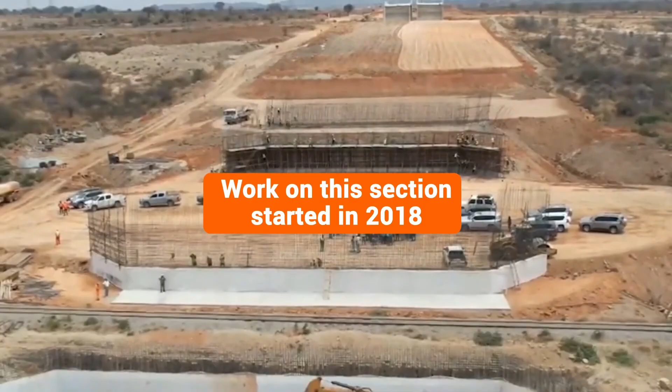From Morogoro, the railway continues into Phase 2. This part goes to Makutopora, which is near Dodoma, Tanzania's capital city. Dodoma is located in the center of the country, making it a natural hub for connections. This stretch is even longer, covering 426 kilometers. Work on this section started in 2018, and from July 2024, it's fully operational. This phase connects Dar es Salaam all the way to Dodoma, making a continuous line of over 600 kilometers. Farmers in the central regions will now be able to get their produce to Dar es Salaam's markets much faster. Goods like grains and coffee will arrive fresher, and transport costs will drop.

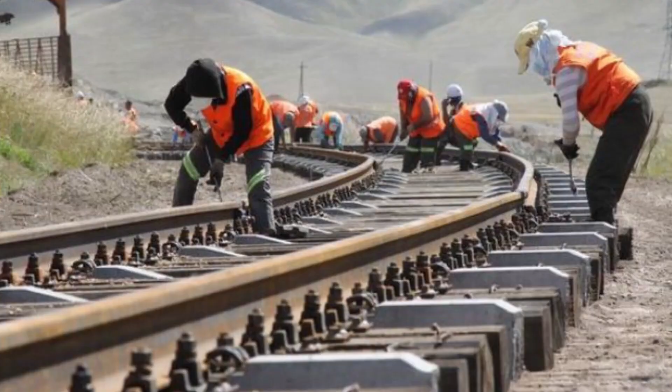Phase 3 takes the railway further north, from Makutopora to Tabora. Tabora is one of Tanzania's older cities, with a strong history as a transport and trade hub. It sits northwest of Dodoma and covers 294 kilometers in this phase. Construction began in April 2022 and includes intersections to connect nearby towns. Right now, the work here is 14% complete, and the entire phase is expected to take 46 months, including testing. When finished, this section will make it easier for people in central Tanzania to travel north and for goods to move between regions without delays.

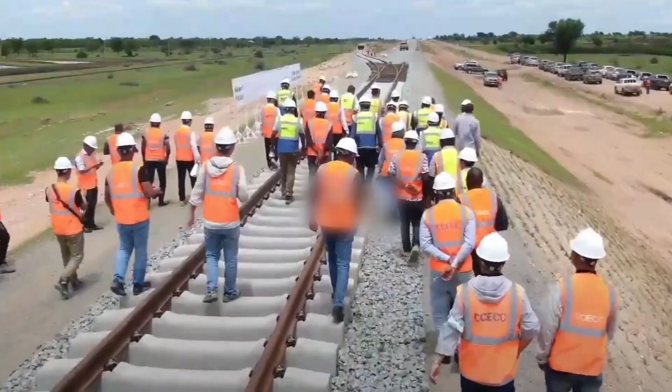The fourth section picks up at Tabora and heads northeast to Isaka. This stretch is shorter at 130 kilometers, but it's critical for connecting Tanzania with its neighboring countries. Isaka is a key trade point for goods heading into Rwanda and Burundi. Construction here started in early 2023, and although progress is at 5%, the work is moving steadily. This phase is set to take 42 months with 6 months of testing included. Once complete, it'll make cross-border trade faster and cheaper, strengthening ties with Rwanda and Burundi.

The final part of this phase-by-phase journey stretches from Isaka to Mwanza, including Isamilo, covering 341 kilometers. Mwanza is in northern Tanzania along the southern shore of Lake Victoria. It's a busy trade center known for fishing and connecting Tanzania with Uganda and other countries across the lake. Construction on this stretch began in 2021 and is already more than halfway complete at 54%. When this phase is done, goods and passengers will move smoothly from the north to the center and all the way to the coast, creating new opportunities for businesses and families alike.

So, how does this railway achieve all this? The answer lies in the technology it uses. This is not an old-fashioned railway with diesel-powered trains. It's fully electric. Trains run cleaner, faster, and more efficiently with less pollution.

Passenger trains reach up to 160 kilometers per hour, while cargo trains move at 120 kilometers per hour. These speeds mean shorter travel times for people and quicker deliveries for goods. It reduces costs for businesses, making products cheaper for consumers.

The construction itself is a marvel of modern engineering. Workers and engineers use continuous welded rails, which are stronger and more durable than older designs. These tracks can handle the weight and speed of electric trains without wearing down quickly. Concrete sleepers hold the tracks firmly in place, ensuring stability.

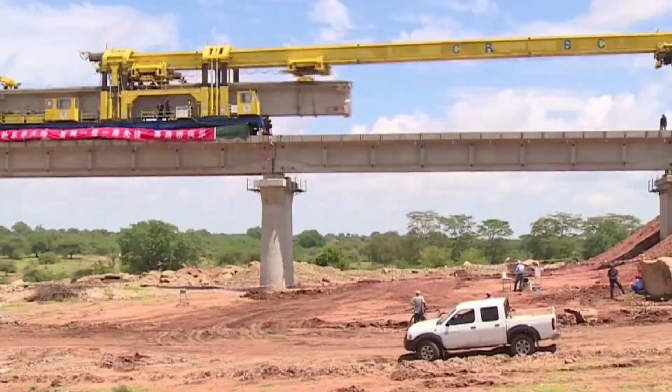Bridges, culverts, and overpasses are carefully built to allow safe crossings for roads, rivers, and even wildlife. Each phase is planned and tested to handle the heavy use it'll see once fully operational.

The stations along the route are also modern and built for convenience. They include automated systems to manage train schedules and ensure safety. Waiting areas are designed to be comfortable, and security systems, including cameras, keep passengers safe. There's also access for people with disabilities, making the railway more inclusive. These stations make traveling not only faster, but also more enjoyable for everyone.

The railway isn't just about faster trains or advanced technology. It's about what these changes mean for the people of Tanzania. Farmers in rural areas will have a reliable way to bring their crops to market, where they can sell them for better prices. Businesses will be able to ship products to customers faster and more affordably. People will have options for travel, whether they're visiting family, attending school, or finding new job opportunities. Time saved in travel means more time for work, education, and life.

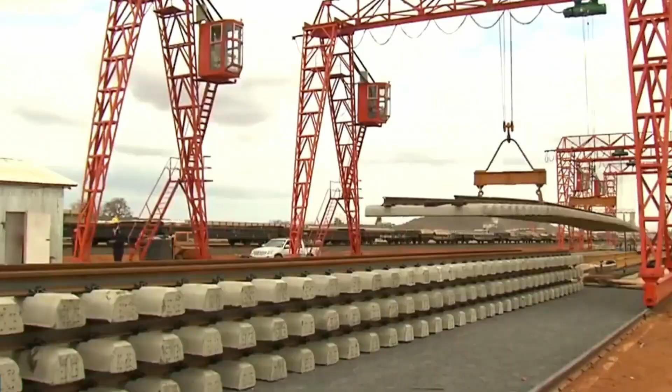However, there's a dark side to this story that we need to explore. Did you know that much of the railway's construction was carried out by Chinese engineers and workers? This has raised concerns about what it means for local Tanzanians. The advanced technology and machinery were mostly brought in from China, which left little room for African workers to learn these skills or be involved in high-level parts of the project. The result? Many Tanzanians worry that they're missing out on important opportunities to gain expertise that could help their economy grow long after the railway is built.

So why did Africa turn to China for this massive project instead of working with European or American companies? The answer lies in the conditions attached to loans and investments. Western countries and financial institutions often set strict requirements focusing on governance, environmental protections, or human rights. While these are important, they sometimes slow down projects or make them less appealing. China, on the other hand, offers loans with fewer strings attached, making it easier for countries like Tanzania to push forward quickly with much-needed infrastructure.

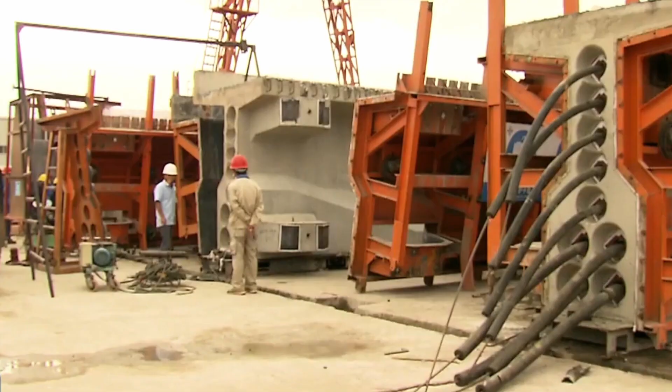But this relationship has its challenges. Many African nations, including Tanzania, have become heavily dependent on Chinese construction firms and financing. Most of the materials, workers, and expertise come from China, which means local economies don't see as much benefit as they could. Worse, there's the looming issue of debt. What happens if Tanzania can't repay these loans? Some fear that China might take control of critical infrastructure, which has happened in other countries. It's a risk that raises questions about the long-term sovereignty of African nations.

Across the continent, similar projects have sparked debates. Kenya, Zambia, and Djibouti have all faced difficulties with Chinese loans. For instance, Kenya's standard gauge railway has been praised for its efficiency, but criticized for its high costs and reliance on Chinese companies. Zambia has struggled to repay its loans, leading to worries that China could seize key national assets. Even Djibouti, where China has a military base, has raised concerns about how debt might influence its sovereignty.

Despite these concerns, China has repeatedly assured Africa and the world that it has no intention of taking over countries or controlling their politics. Officials have highlighted China's commitment to mutual respect and cooperation, but critics argue that these reassurances often lack transparency. When asked direct questions about the risks of debt dependency, China sometimes avoids giving clear answers, which doesn't help ease the doubts.

On the brighter side, some African nations are taking steps to balance the scales. Regional cooperation is growing, with countries working together to reduce their dependency on a single partner like China. They're seeking new ways to finance projects, sometimes turning to partnerships with private companies or exploring regional development funds. These efforts show that Africa is not passive in this story. It's looking for ways to take control of its future.